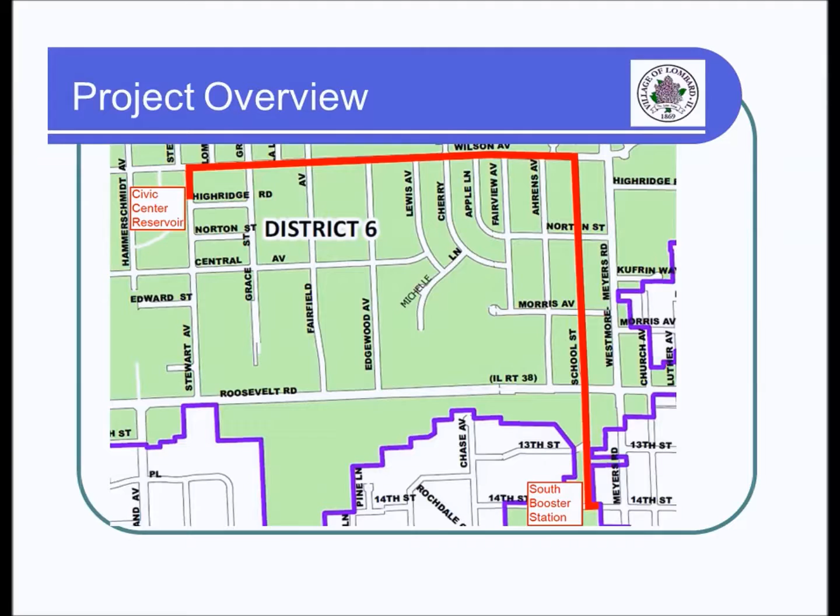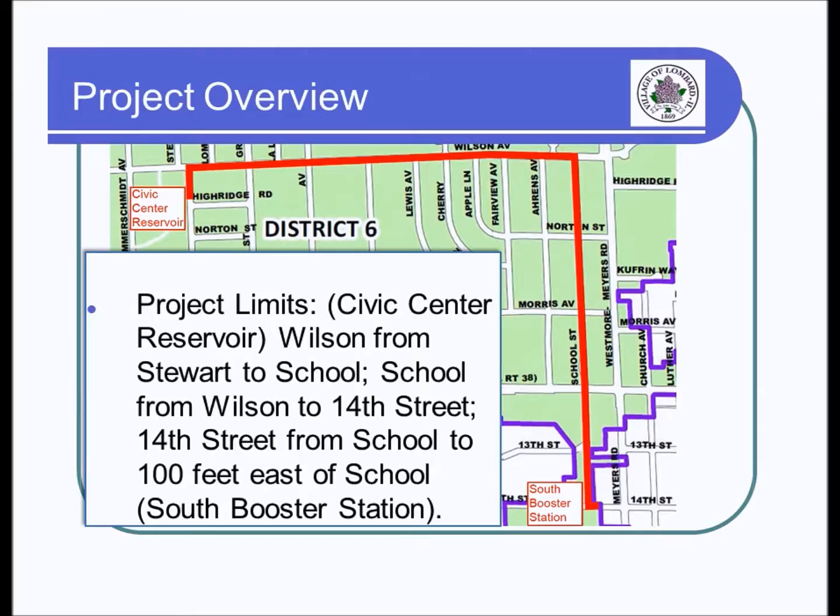The project begins at the Civic Center Reservoir near the intersection of Stewart Avenue and Wilson Avenue, and runs along Wilson Avenue from Stewart Avenue to School Street before turning south along School Street between Wilson Avenue and 14th Street to the South Booster Station. Generally, this project includes the installation of approximately 8,500 feet of new 16-inch transmission water main installed directly beneath the pavement by both trenching and trenchless drilling methods.

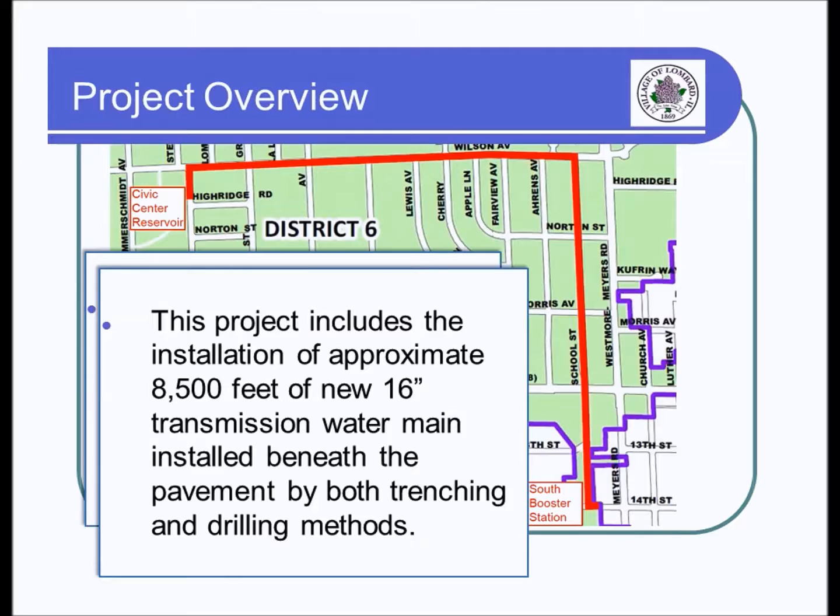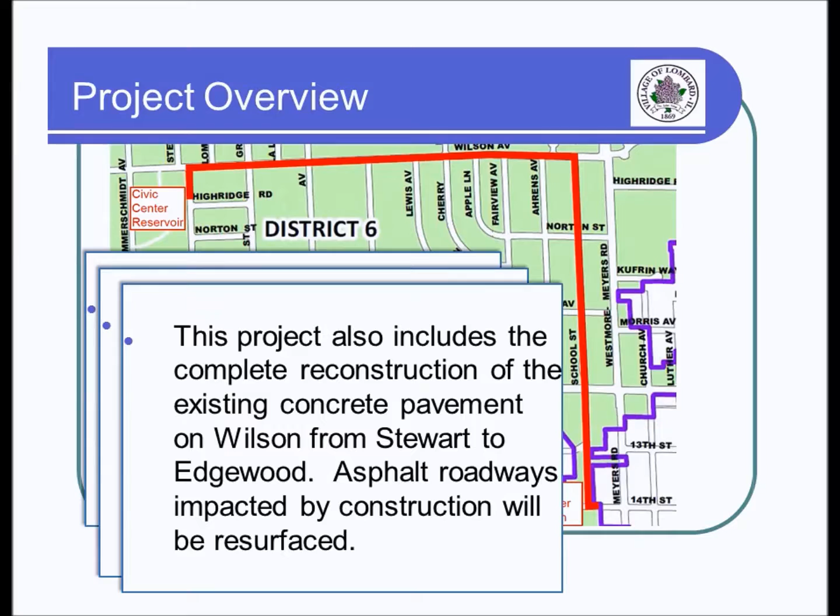This project also includes the complete reconstruction of the existing concrete pavement on Wilson Avenue from Stewart to Edgewood. All other asphalt roadways impacted by construction will be resurfaced following utility installation. Work will be performed in essentially 4 stages. Road closures and detours are anticipated for each of the 4 construction stages, which we will explain in further detail shortly.

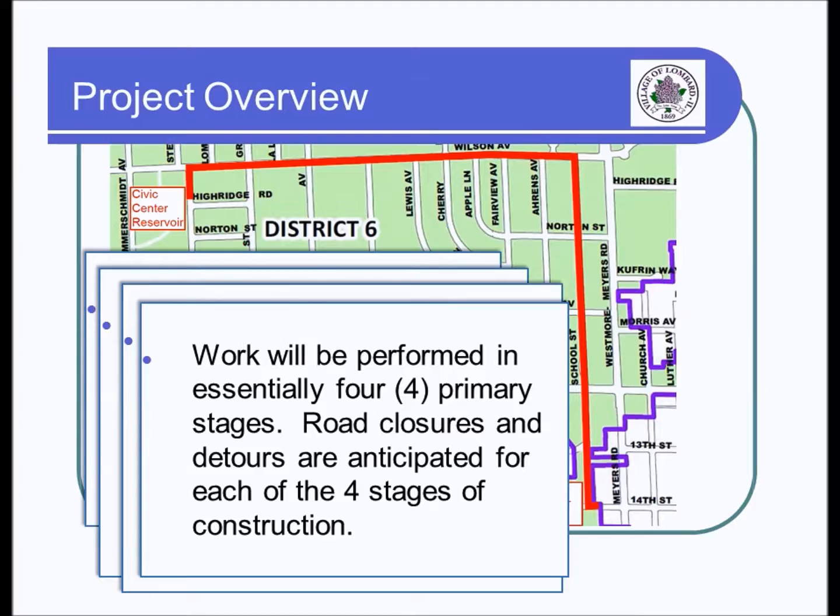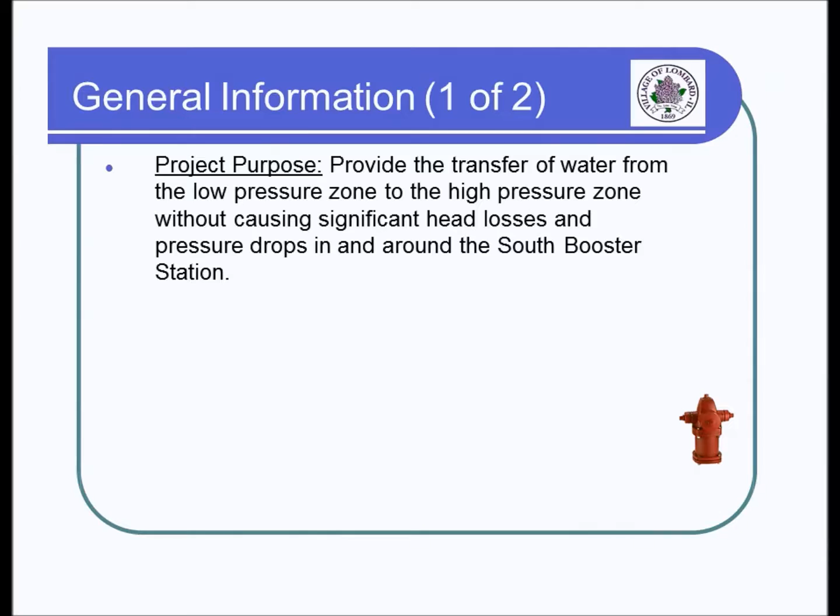Next, we will walk through the general background information, starting with the project purpose. In 2013, the Village of Lombard performed a water network analysis to look at water system capabilities and recommendations for improvements. The study determined that the village should construct a transmission water main to connect Civic Center Reservoir, located near Village Hall, to the South Booster Station on 14th Street. The overall purpose of this project is to provide the transfer of water from the low pressure zone north of Roosevelt Road to the high pressure zone south of Roosevelt Road without causing significant head losses and pressure drops south of Roosevelt. The benefits received from this project are as follows.

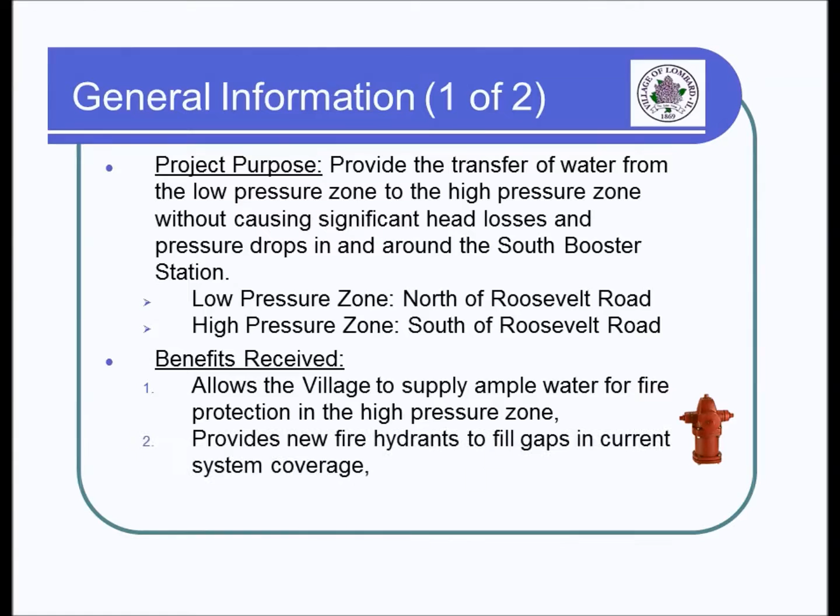This allows the village to supply ample water for fire protection in the high pressure zone south of Roosevelt, provides additional fire hydrants to fill gaps in current system coverage, and increases Lombard's ability to sustain higher water pressure throughout the system quadrant. This project is funded by a public water supply loan obtained from the Illinois Environmental Protection Agency, or Illinois EPA.

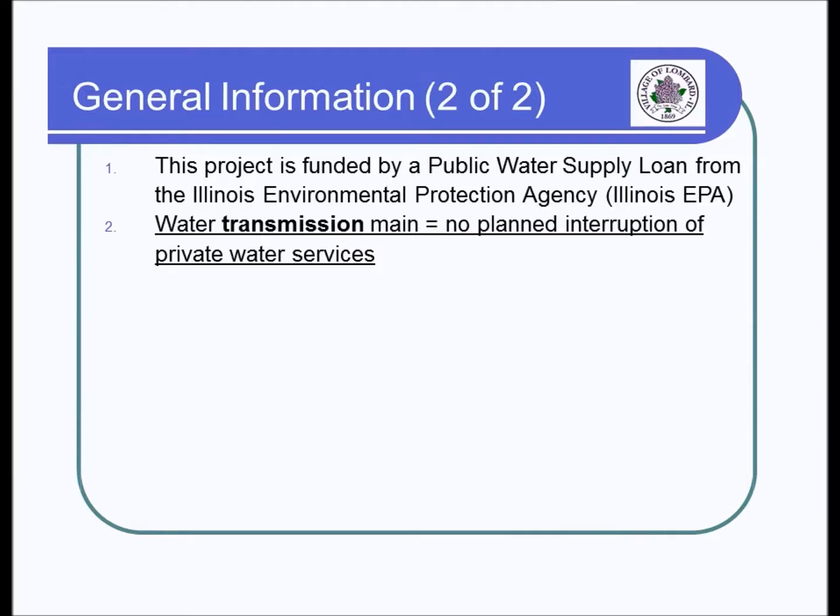Please note that this is a new water transmission main project intended to convey water from one point to another, not a distribution water main. Therefore, no planned interruption of private water services is anticipated, as they will not be disconnected from the existing water main in your area. Sewer replacement is only required where the transmission main crosses or is in conflict with the existing sewer. Private sewer services will be avoided, where possible, to reduce interruptions to your sanitary sewer service.

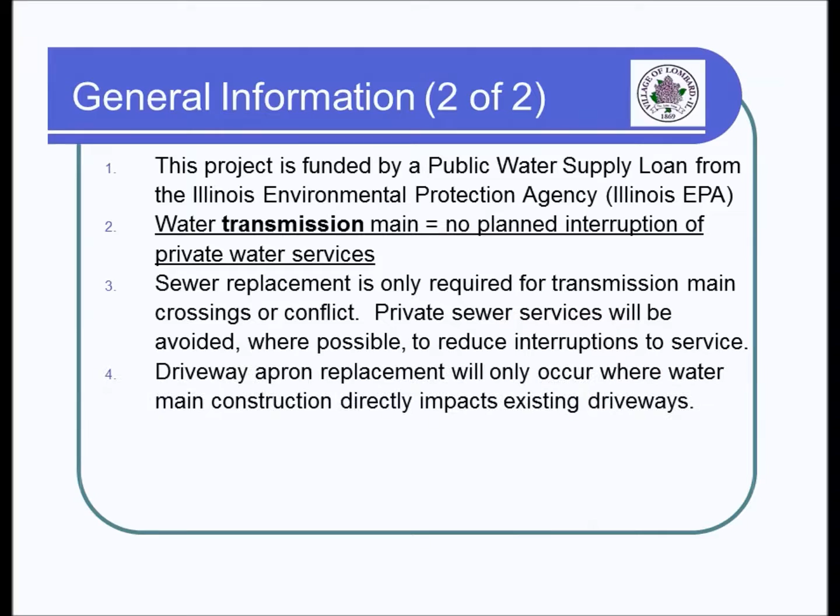Driveway apron replacement will only occur where water main construction directly impacts existing driveways. And again, as previously mentioned, the existing concrete pavement on Wilson Avenue from Stewart to Edgewood will be reconstructed. All other asphalt roadways impacted by water main construction will be resurfaced following utility installation.

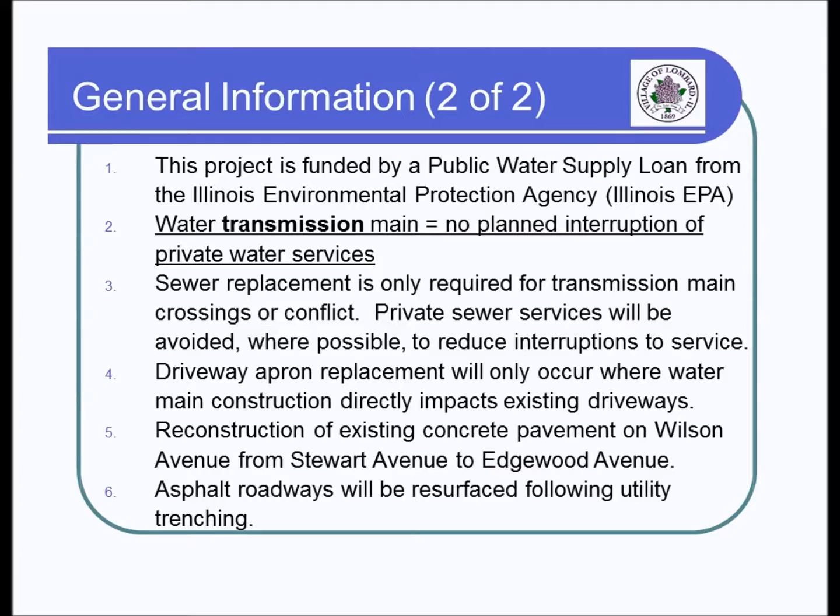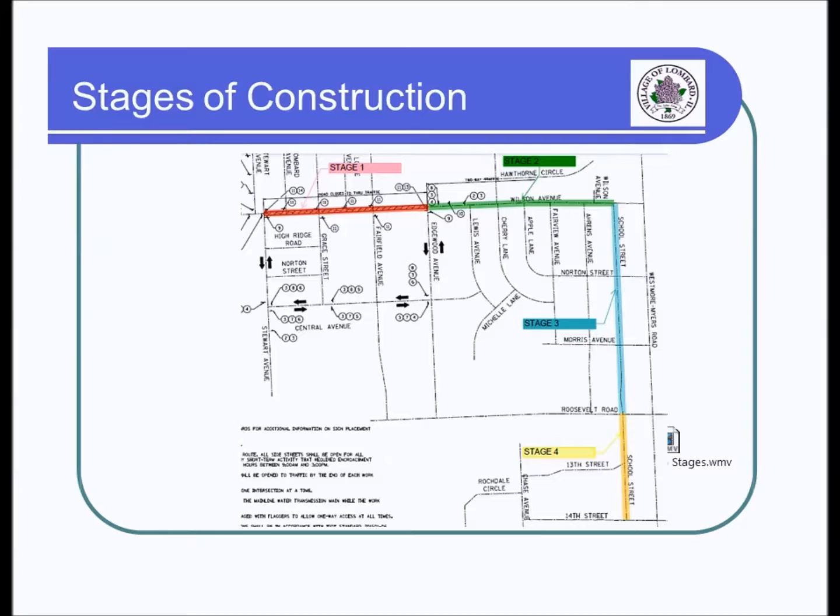Now looking at the stages of construction, this project has been broken into 4 separate construction stages, which are all shown here. Stages 1 and 2 are both located along Wilson Avenue.

Stage 1, as seen in red, begins at the intersection of Stewart Avenue and Wilson Avenue and ends near the intersection of Wilson and Edgewood. Stage 2, depicted in green, begins near Wilson and Edgewood and ends at the intersection of Wilson and School.

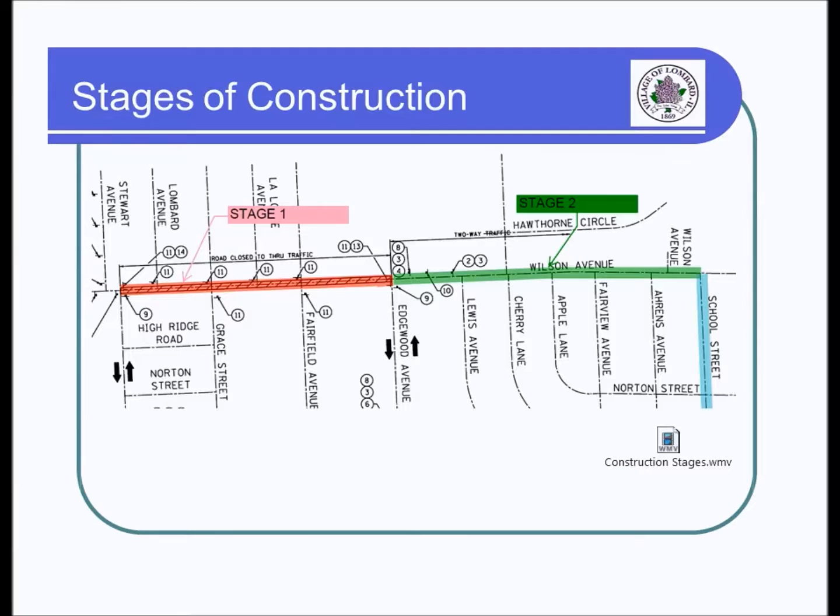Stages 3 and 4 are located along School Street to the south. Stage 3, depicted in blue, begins at Wilson Avenue and School Street and ends to the south at the intersection of School and Roosevelt. Stage 4, as seen in yellow, includes School Street from Roosevelt to 14th Street.

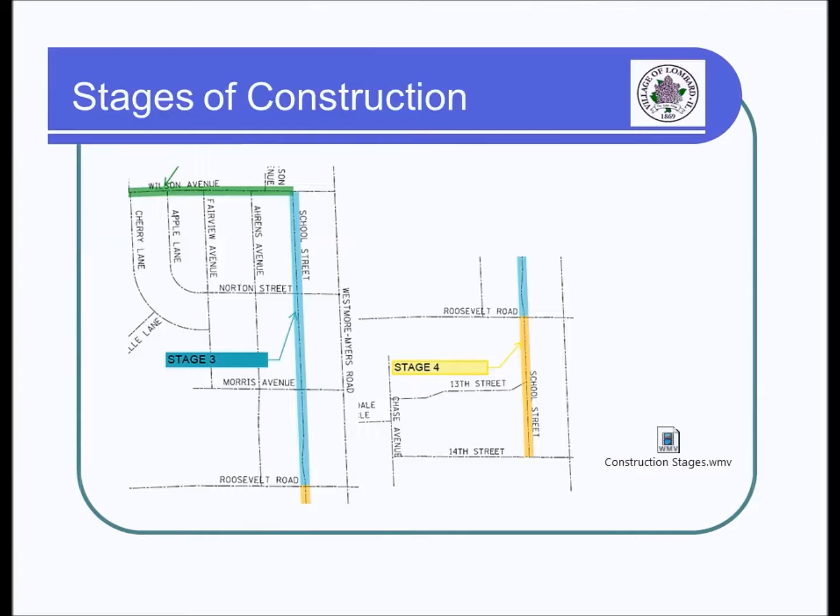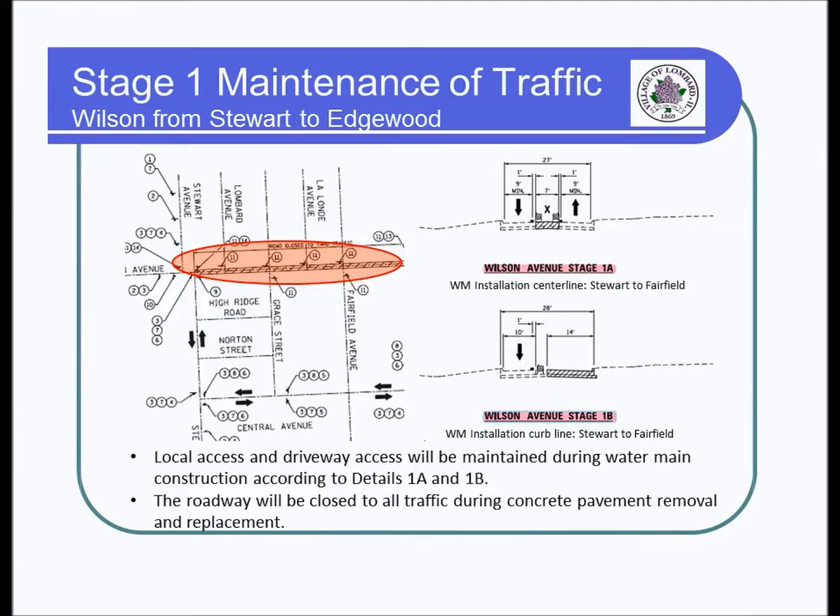Stage 1, Wilson Avenue from Stewart to Edgewood. For maintenance of traffic during Stage 1, local access and driveway access will be maintained during water main construction as depicted by Stages 1A and 1B details shown to the right. However, the roadway and all driveways will be closed to traffic during pavement reconstruction. Exceptions can be made by the village for those persons with special needs.

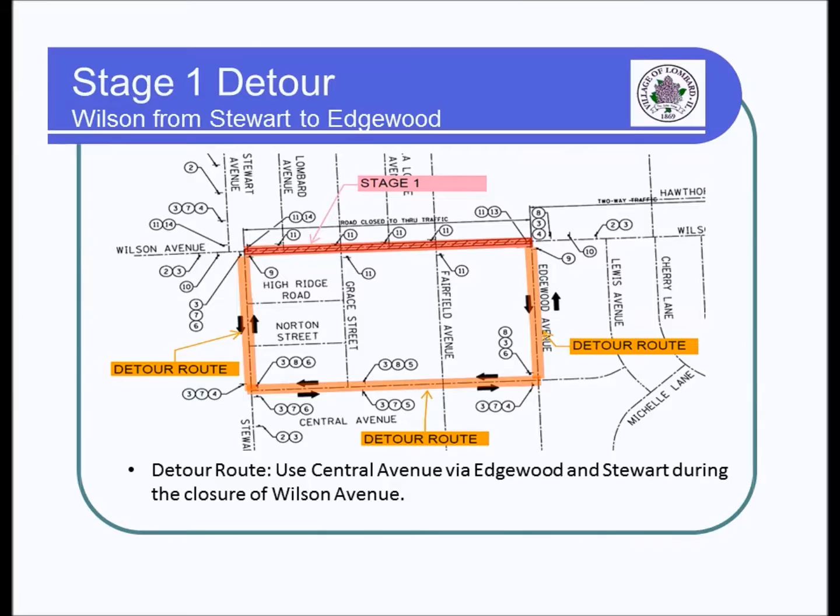The Stage 1 detour is shown here. As can be seen, the detour route is Central Avenue, using both Edgewood and Stewart during the closure of Wilson Avenue. Moving on to Stage 2, Wilson Avenue from Edgewood Avenue to School Street.

For maintenance of traffic during Stage 2, local access and driveway access will be maintained during water main construction and roadway resurfacing. However, traffic will be restricted to one way, westbound only on Wilson Avenue during Stage 2.

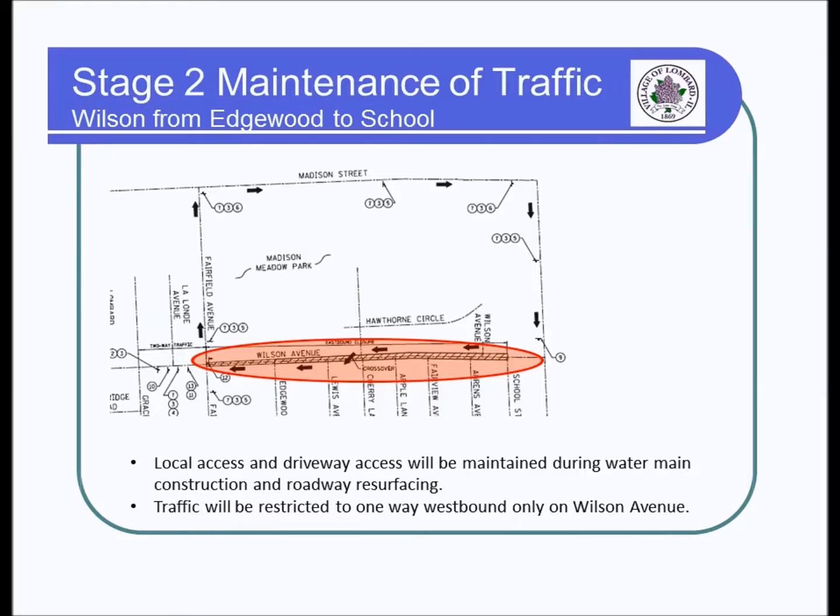The Stage 2 detour route is shown here. As can be seen, the detour route is Madison Street, using Fairfield Avenue and Westmore-Meyers Road. Again, please note that Wilson Avenue will remain open to local traffic only in the westbound direction.

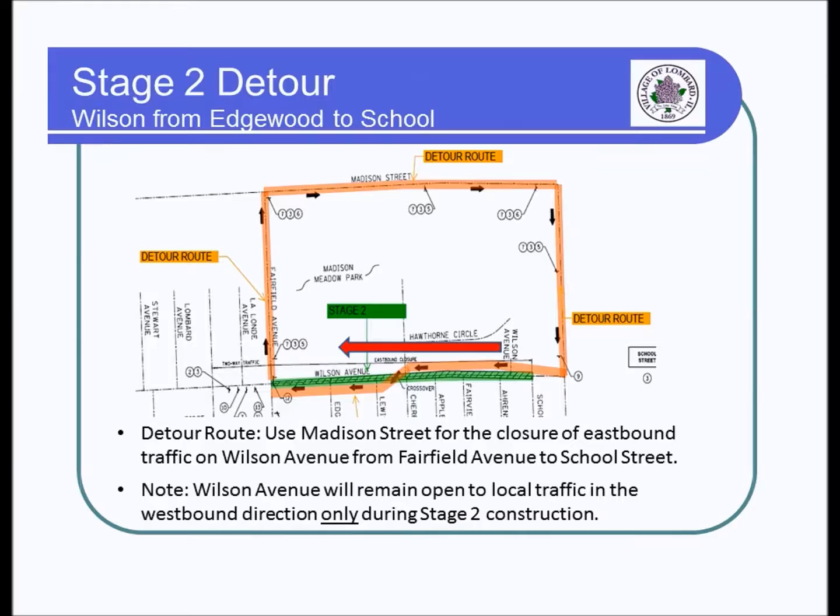Stage 3, School Street, Wilson Avenue to Roosevelt Road. For maintenance of traffic during Stage 3, local access and driveway access will be maintained during water main construction and roadway resurfacing.

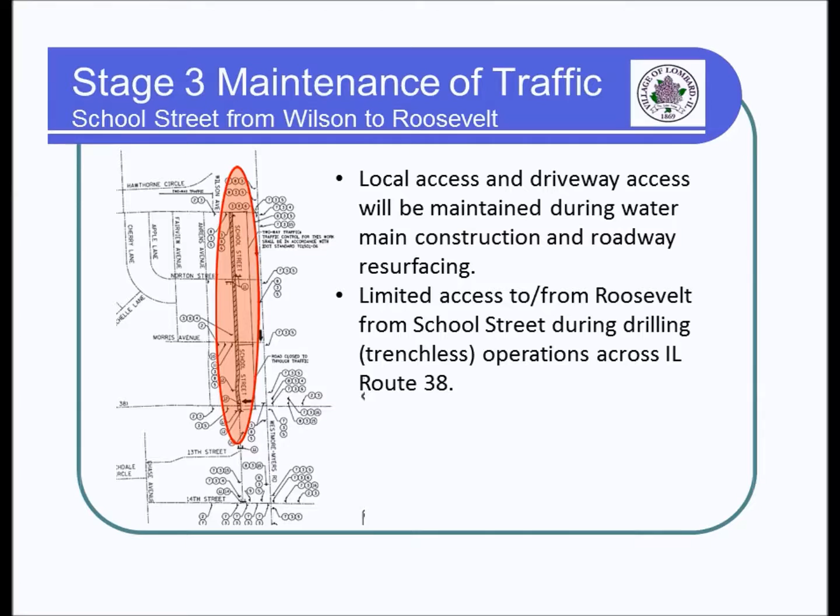However, there will be limited access to and from Roosevelt Road from School Street during drilling or trenchless water main installation. For through traffic during Stage 3, the detour route is Westmore-Meyers Road using Wilson Avenue and Roosevelt Road.

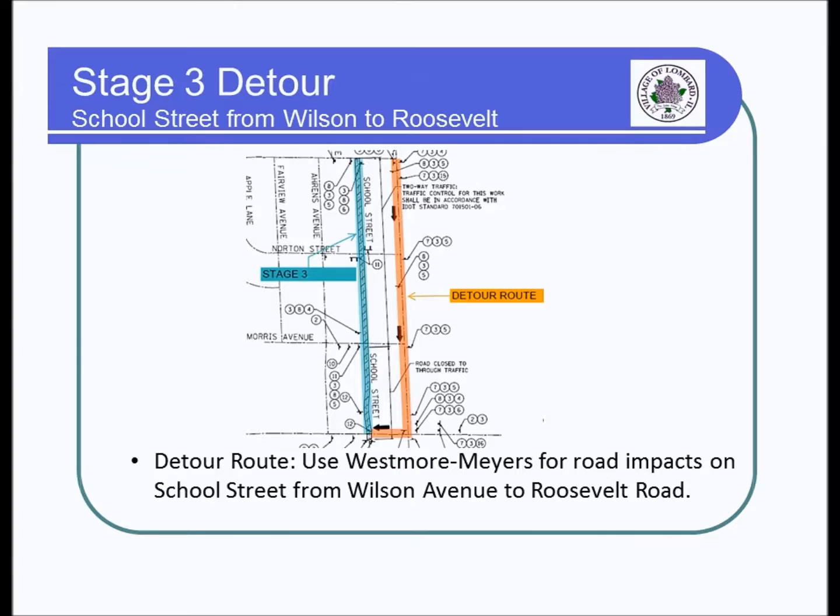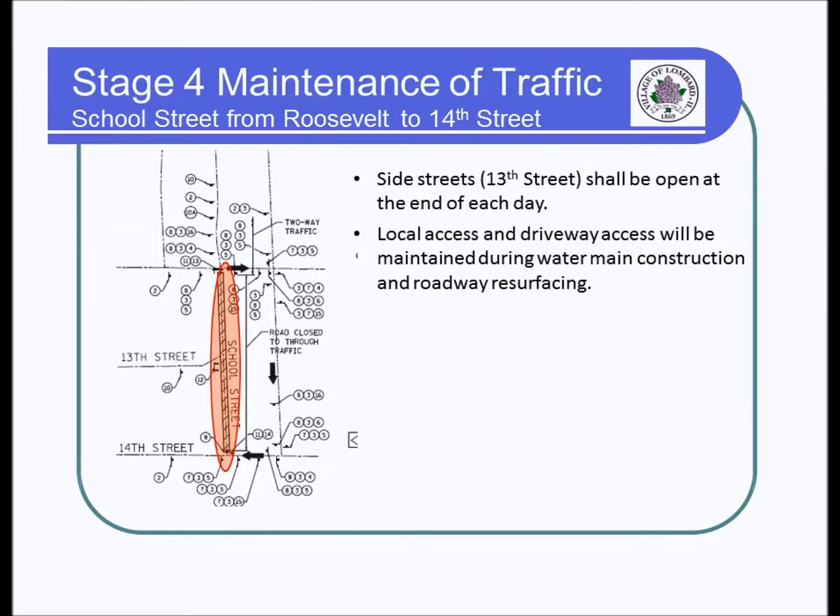Lastly, Stage 4, School Street from Roosevelt Road to 14th Street. For maintenance of traffic during Stage 4, access to 13th Street will remain open at the end of each working day. Also, local access and driveway access will be maintained.

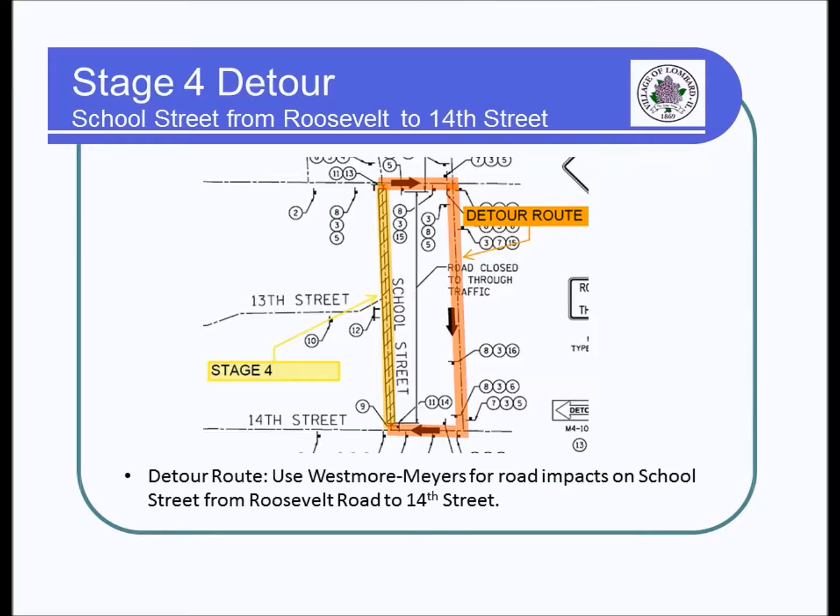Here you can see the Stage 4 detour. Stage 4 detour is Westmore-Meyers again, using Roosevelt Road and 14th Street. Now I'm going to turn it over to Mark Docksteiner for more construction information.

Thank you, Kevin. My name is Mark Docksteiner. I'm here to discuss the construction and what each resident may expect during the process of this project. The contractor is Swallow Construction Corporation. They're expected to begin the project on Monday, June the 13th. The completion date is, as we discussed before, in fiscal year 2016.

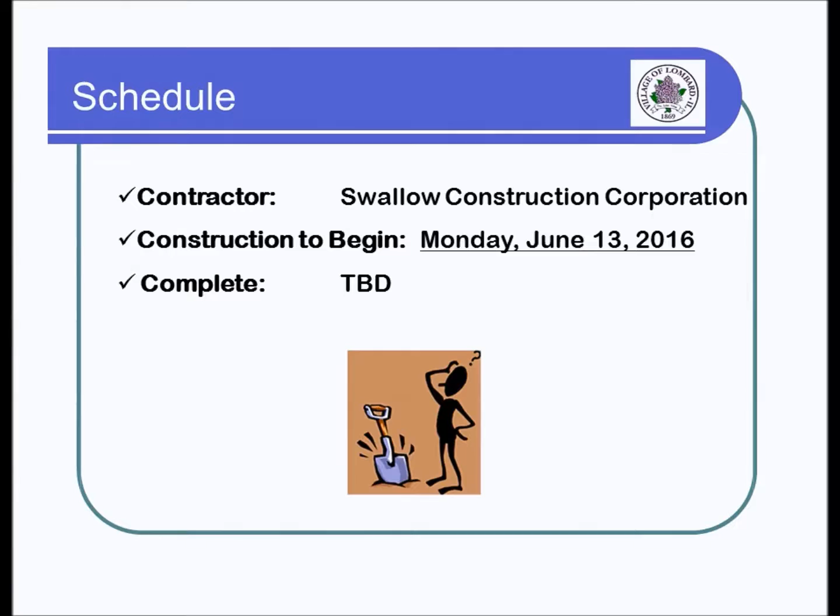Construction sequencing and anticipated sequencing. The contractor will come start the project, and you'll see them trimming the trees, root pruning, and then they'll begin saw cutting the pavement for the water main installation work and the sewer installation that needs to be done on the project. Once they get the water main installed, they'll be going back and addressing the storm sewer and any sanitary sewer repairs that are needed.

Following the underground work, the contractor will come back to do the asphalt roadway work, which involves, on the reconstructed streets, putting in a brand new road base and asphalt materials, and also curb and gutter and some driveway approaches as needed. And then the curb and gutter will also be installed, and sidewalk will be installed as well, along with the residential driveways.

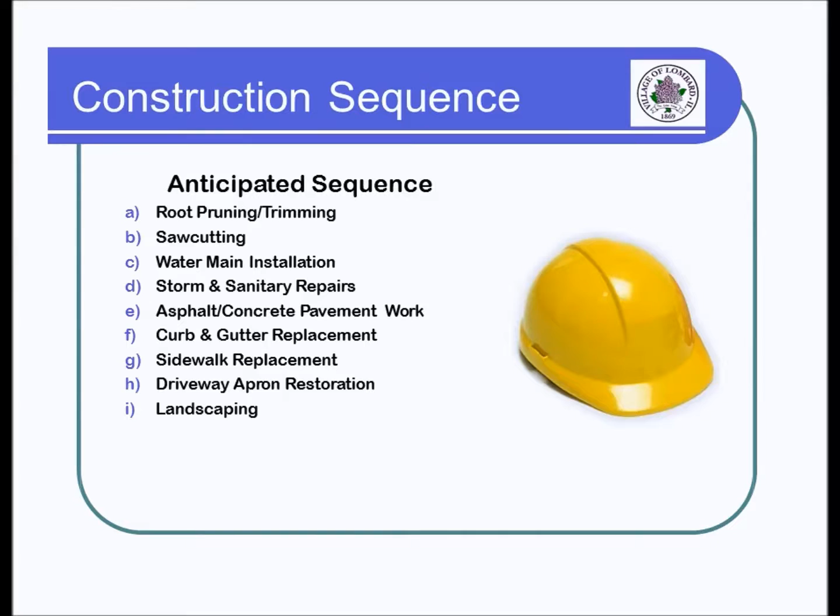And in the areas outside of the reconstruction area, the water main trench will be patched, and then the areas will be milled and resurfaced on Wilson Avenue and School Street. And then once all the roadway work is completed, at the end of the job, the contractor will do the parkway restoration, which includes putting down topsoil and sod.

Resident awareness that you may receive during the project. The easiest way to find out what's going on with the project is to go to the website. You're going to receive during the project newsletters, door hangers, and email if you sign up for that through Notify Me on the village website.

And on that portion, we'll tell you when the project's going to start, if there are any changes in the schedule, any temporary closures of the roadway, when a tree may be removed, protected or trimmed in front of your property, and if there are any sewer and water shutdowns that you need to be aware of. Also, one of the other items would be parking.

If you have to park on-street, especially during the reconstruction work, you'll be assigned a side street where you could park during the evening until you can get back into your driveways. That also includes where any of the driveway aprons or sidewalk are being replaced in front of your properties. And during the concrete paving work, there'll be some limited access as well.

Once the sidewalks and the roads are ready to go, the parkway restoration shouldn't have any impact on you getting into your property. But during the reconstruction period, there would probably be at least a 21-day period where you will not be able to get in and out of your driveways.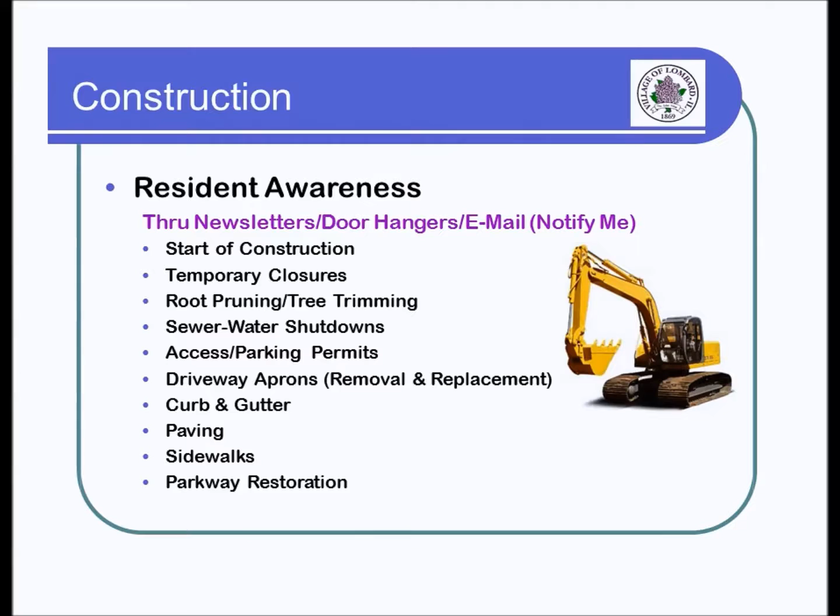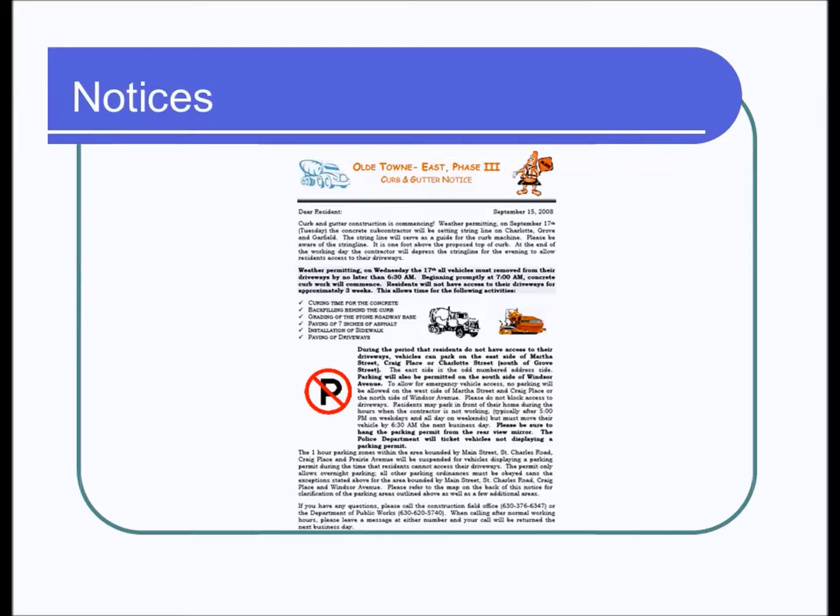This is a sample of the newsletter that you'll be sent either through email or can find on the village website. Notices are also located on the website, and they can be emailed to you. Here are some samples of the door hangers that you would have for each operation of construction. On the left, the orange tag is for driveway access notice.

We would like to give each resident a 2-day advance notice of when we're going to be working at their property. And also if there's any water or sewer work that needs to be done, or any public or private utilities that are going to be addressed, to let you know 2 days in advance that work may be going on at your property.

The middle tag, the blue tag, is for disruption of water service. If by chance your water service needs to be addressed, we don't anticipate it, but if it does happen, we'll put the tag on there to tell you what time the water service work will be going on, so you can plan accordingly. Then on the far right-hand side, the gray tag, water shutoff, will give you the date and time and the reasons for the work that's being done.

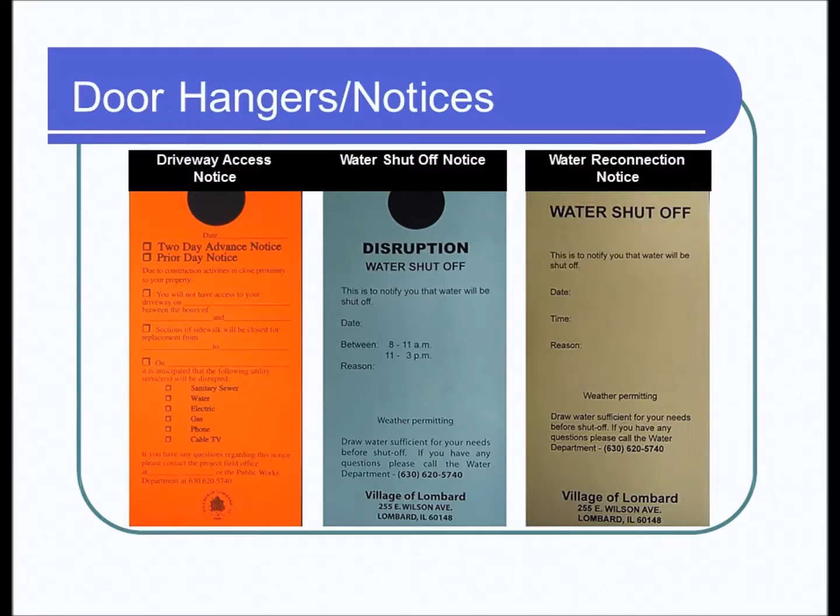Notify Me is provided through the village. An email gets sent out to your account once you sign up for any notices that happen during the project. To sign up, you go to the village website and follow the instructions on the top of the page.

Access and parking permits: like we discussed before, the residents will have access during construction, and the village will issue overnight on-street parking permits to registered vehicles. Disabled individuals, please let us know if you need to get in and out of your driveway every day for medical reasons or any other special reasons, and the resident engineer, Rich Heimbaugh, will be glad to assist you in making sure you can get in and out of your driveway.

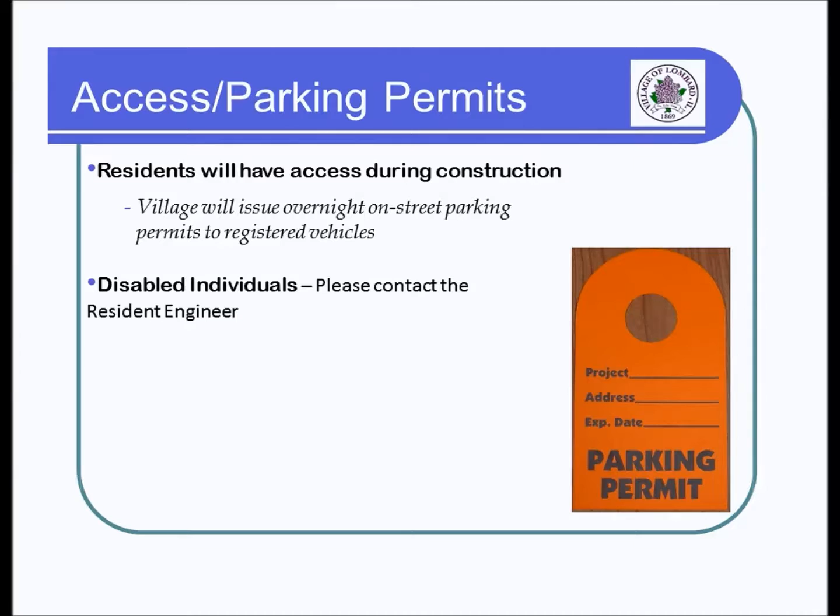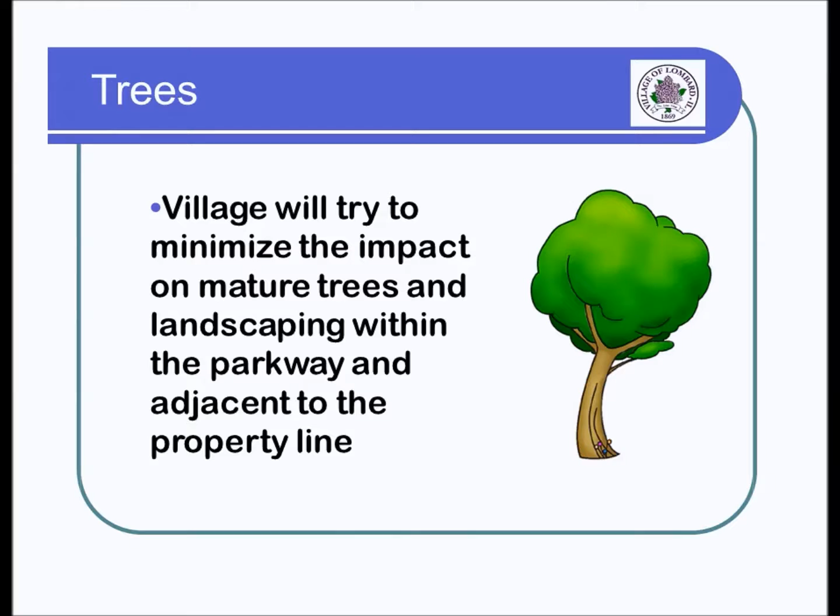The village will try to minimize impact on mature trees and landscaping within the parkway and adjacent to your residential property. Some trees will be removed if they need to be due to the construction or if they're planned to be removed. Other than that, they'll be trimmed, and some of them may be fenced off and protected during the project.